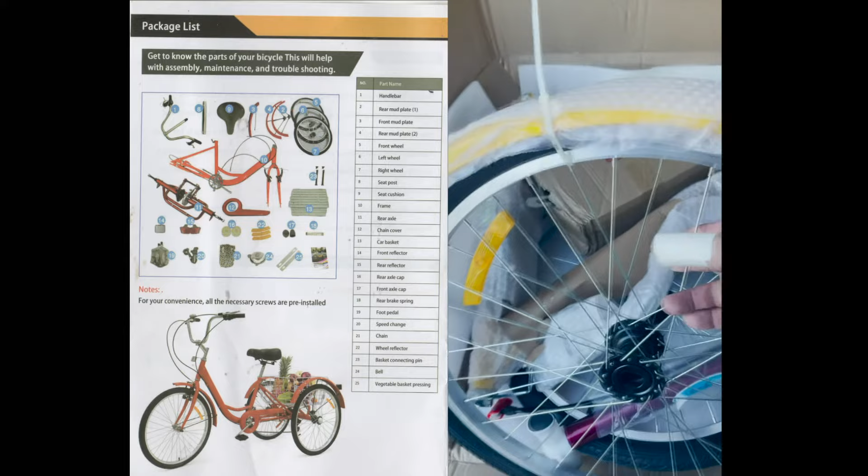First look, it comes in a nice sized box. Let's open it up and see what's inside. Start to remove that, and we'll begin to see all the components. This must be the basket. Then we see the bicycles, the tires, basic frame, all wrapped up, keeping it nice and safe. They've zip tied the fender to the tires, which keeps the fenders from getting bent up and makes a nice way to pack them as well.

Handlebars, all wrapped up. Tire pump. And the basic frame and the seat. So they've wrapped everything very neatly, to keep it from getting scratched and damaged in transit.

All looks pretty good. Looks like this bag must have the rear axle. This particular variety is a 7-speed, you can see all the sprockets. This box is probably the one that scares most people, because I'm sure it has all the little parts and the screws in it, and hopefully the actual instructions.

I guess it comes with a bike lock. Nice. So a set of Allen wrenches to help you put it together. Nice. This must be the instruction book.

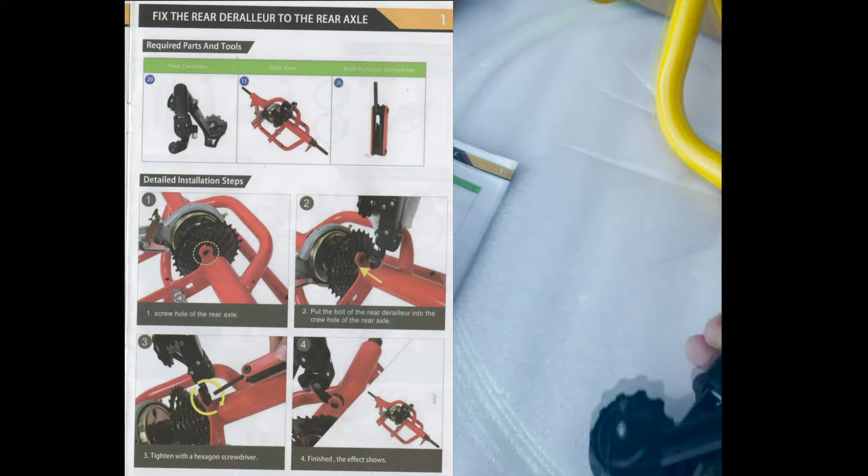We're going to need the tool they gave us, and it tells us where to put this on. So we're going to put this piece on there. Now, just to show you, when it came, the screw was already in place but it wasn't firmly seated in. So I'll point out, you notice it has those little tabs. First make sure that the screw seats firmly in the way that it's supposed to.

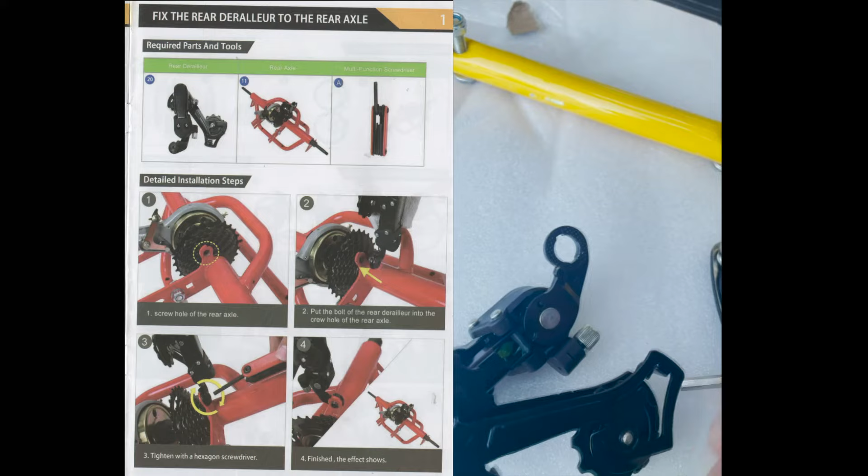If you're wondering, the part with the little dimple pattern here, that's going to face the metal. That's to keep it from moving. You'll see it smooth on this side. With this snapped in place, you see that the bolt fits down smoothly. You'll see how the tabs are hugging the inside, to keep it in place while you screw it in.

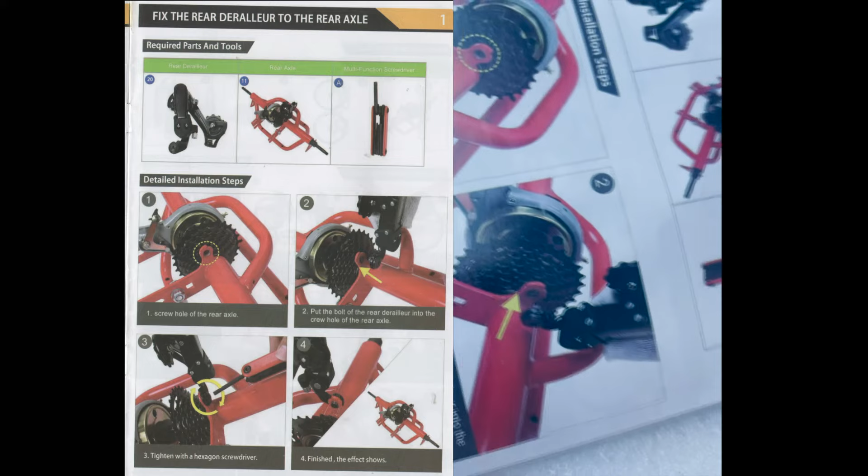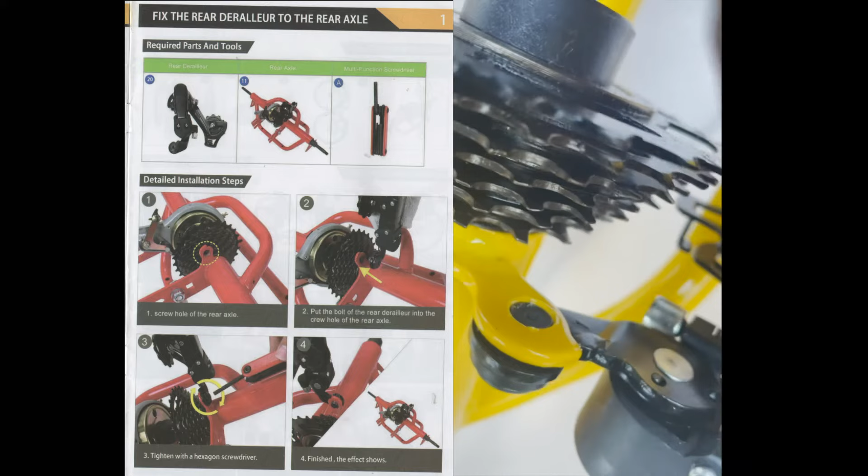And then we're going to put it on right here. Based on the picture, looks like we want it standing up, so we're going to hold it just like this when we put it in. As you get this in place, you'll notice the rear has a little hold onto it. If you come from this side, you'll see how there's a flat edge, so when this is in place, that's going to catch right on the end of that. Now we just have to tighten it down. It says we're finished when the effect looks like this. So go over to the one that I just put on, and I think that means we're finished.

Step 2 says we're going to attach the wheels, or a wheel, to the back axle. We'll need the wheels, I have those here, these rear axle plugs, the little plastic covers to keep it from snagging on anything, and an adjustable wrench, which I found.

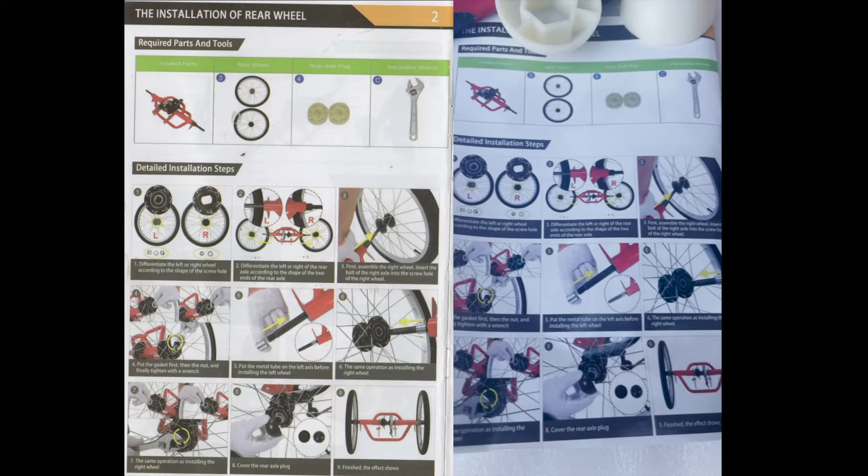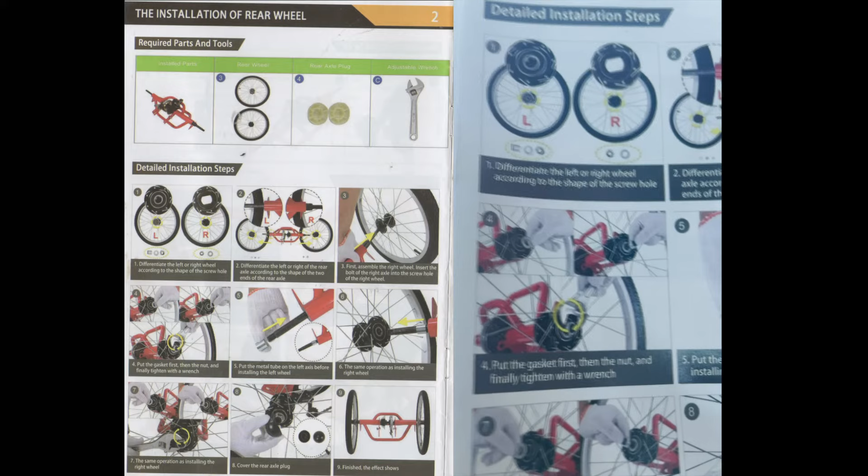So now we will follow these instructions. First, it tells us to determine the left and right wheels based upon the shape of the screw hole. Then, given that, we will put it on either side, fit it on the assembly, put in the gasket, then the nut, and finally tighten with a wrench. Put the metal tubing over the left axle before the left wheel, and then the same operation as with the right wheel.

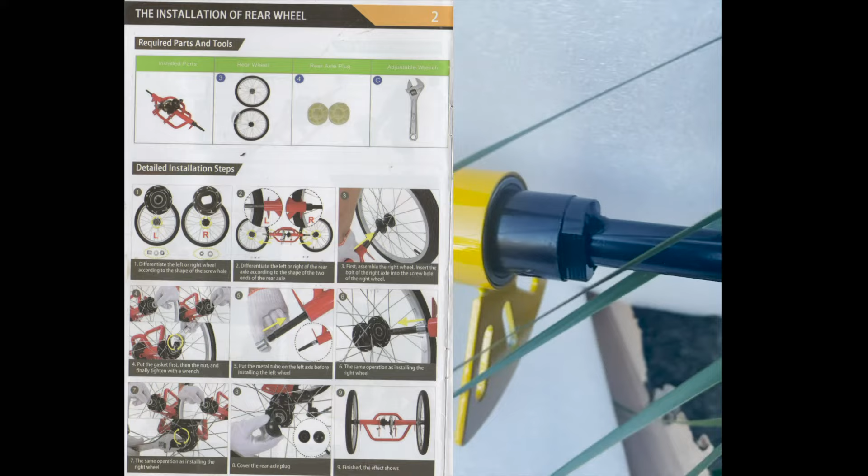And put the plug on it. So let's see if we can get that done. This one with the circular axle entrance is going to be the left wheel. This one with the square or rectangle is going to be the right wheel. And then when we look at the actual axle, you'll see that the rectangle one applies to this side, and the circular one will apply to that side.

And there's the metal sleeve it also told us to insert. They have the pieces partially assembled in the place where they're going to go, so we have to take those off, put the wheels on, and then put those back in. The left wheel has this little metal collar that fits on before the wheel, and then it's bolted on. The right wheel, which they had us do first, has a square that the wheel went into. Now we just have to tap on our sprocket or our covers.

Covers are on the bolts of the wheel. It's supposed to look like this, according to this. Good. On to step 3.

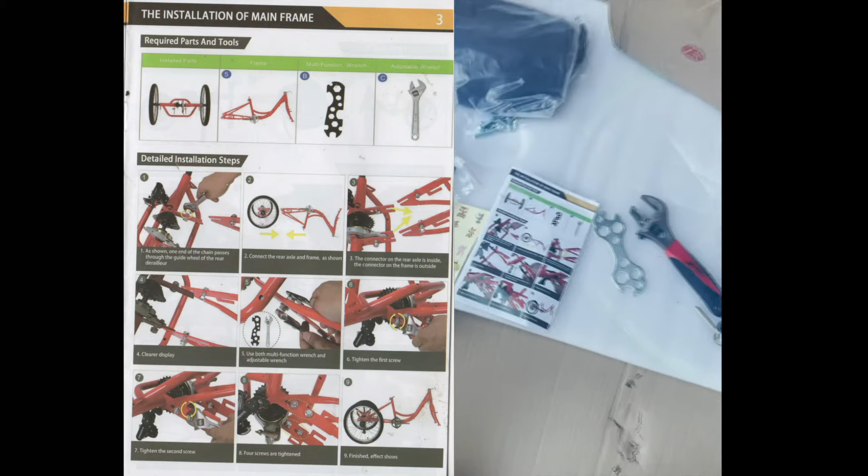Now for step 3, we're going to attach the frame to the rear axle. It says we'll need the wrench tool they gave us, as well as our adjustable wrench. And we're going to first,

One end of the chain passes through the guide. Then we're going to have it on upside down. We figure out where those attach. Then, that's a clearer display, it says.

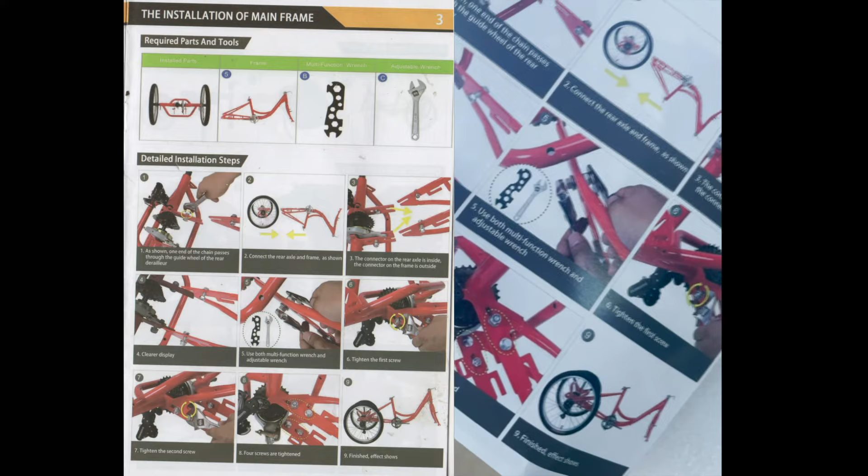Okay, we're going to use the multifunction wrench and an adjustable wrench to tighten those down. We're going to tighten the first screw, tighten the second screw. Four screws are all tightened, and then we will be finished like this.

Now, during the unpacking, I would caution that as you remove the packing, just be careful, don't go crazy with your knife. You do have a couple of cables that are going to be for the gear shift and the brake. You want to make sure you don't nick those accidentally. So use care as you take the plastic wrap off. That was to keep your frame nicely painted.

This axle on the bottom here is just temporary in order to maintain the spacing. We'll have to remove this before we put it together, as you see in their pictures here.

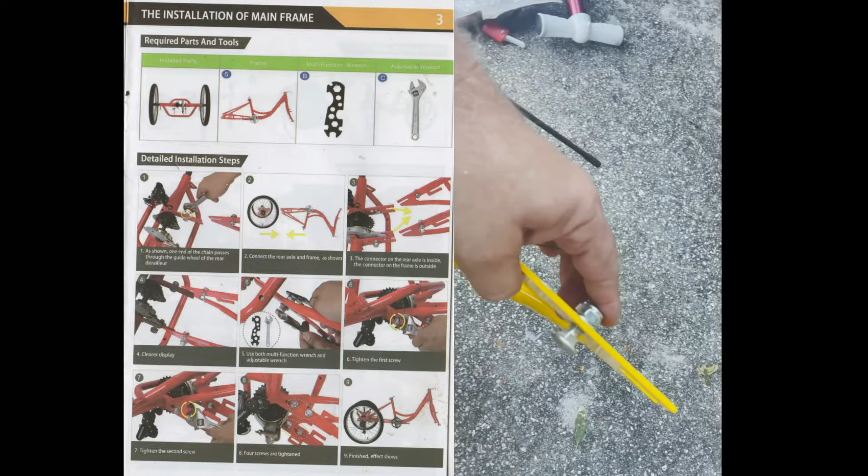Here I'll point out, you'll notice on these screws that they have kind of a square head on the inside. Now that doesn't fit through the hole here, so this is designed to fit in this slot, so that when you tighten it down, the square fits on the inside, and that holds it while you tighten the lug nuts.

Now before we start tightening this down, you'll see we slid it in where the rear part slid over the bolts. Now the picture only shows one, but I have 2 bolts on this one. And then this front bolt is the one that had the square end on it. So if you look, you see the square and how that fits into the slot.

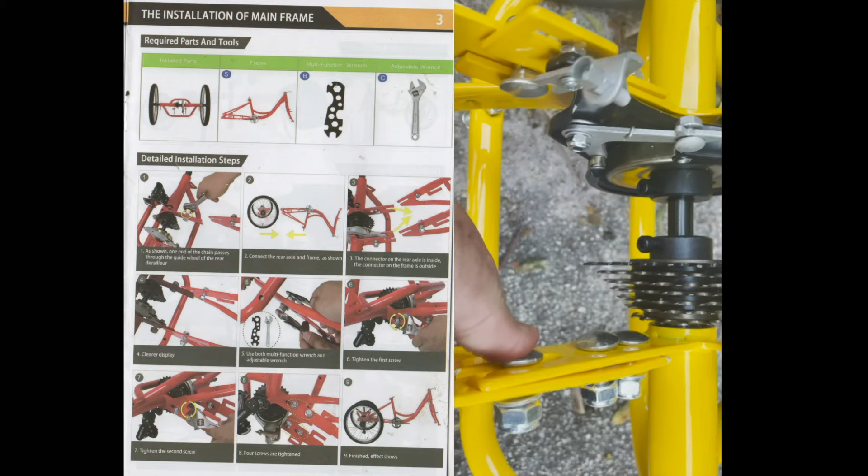So when you tighten it down, then it won't turn. Same for this side. See, the square end will go right in there. Now I'll point out, as you tighten these, you'll notice, see, there's a little bit of gap between the metal. Obviously you're going to pinch that down, so you'll know you have it tight when you bring it all together

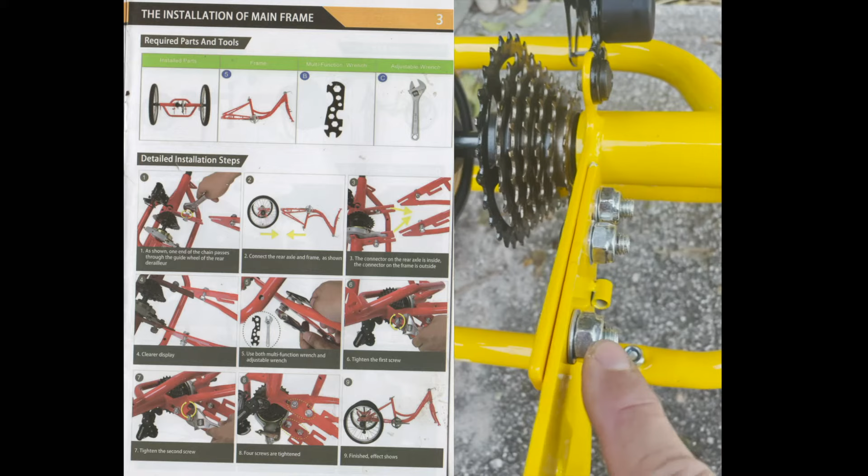Like this. And you may want to tighten one down, not as hard as you can, but snug, then move on to the next one, and move on to the next one, and then come back and finish tightening them down as snug as you can.

I guess I should point out one discrepancy between the instructions and the actual bike that I have. And that is, it shows you when you're tightening them down to use the multi-tool on one side to hold the nut and your adjustable wrench on the other side. But point in fact is the ones that I have, these carriage bolts, and the carriage bolts have a square end. So you don't have to have anything hold this side. So all you're using is your adjustable wrench to tighten them down.

At the end of step 3, it says to set the bicycle upright, which I have done, and remove the rest of the safety packing to help protect the finish. We're ready to move on to step 4.

Step 4 is about installing the chain. It says we'll need the bike frame, which we just set up, the chain, and this chain tool. And we see we have this here.

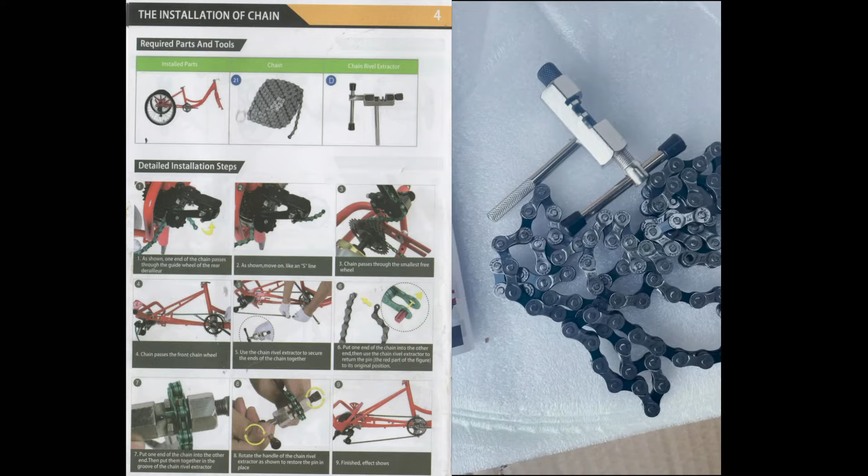I will point out, you should work, just don't be aggressive at straightening out your chain. If you get a double kink in it somewhere, just be gentle, go back and forth until you get it worked out. You don't want to tie it in a knot.

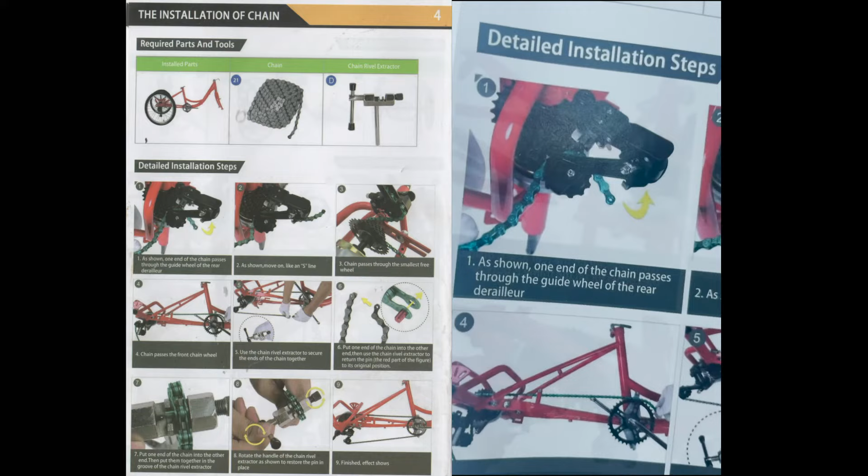But this begins to show you how you go through one end of the guide wheel, or you're going to go around the sprocket. It says to go through the smallest freewheel, then you pull it forward, you go over your pedal sprocket, you're going to bring the two ends together,

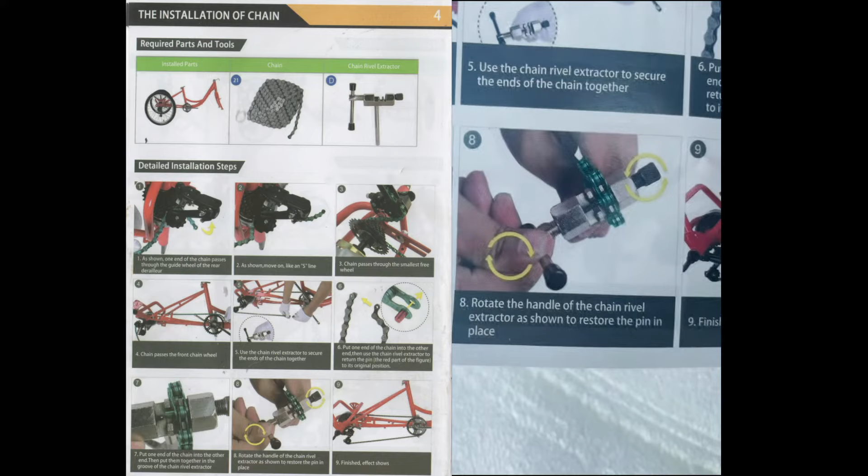You're going to put one end of the chain into the other. In the tool, you see where it's mashing the piece in, and then as you tighten that down, it puts the little peg between the chain in order to have it finished.

The chain comes with this last peg extended, so you're going to put it through this hole into the chain, and then the tool is used to clamp this little bar in all the way so that you have a solid chain when you're done.

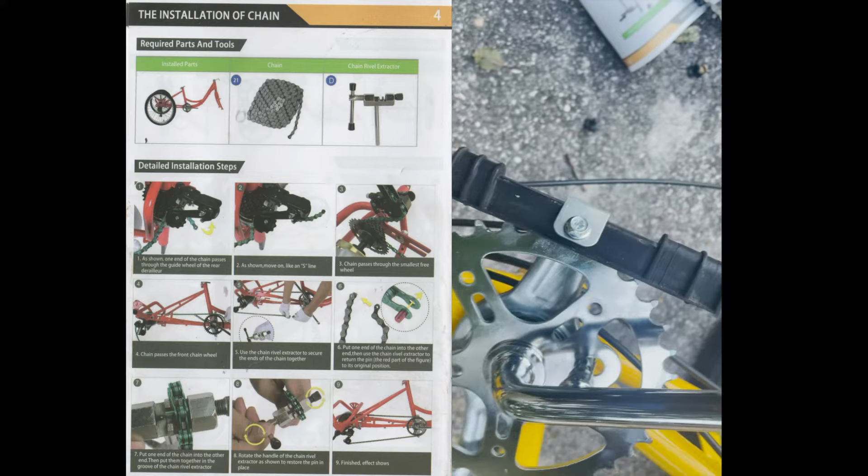Now you'll see there's this little plastic bit covering the sprocket here. That was to keep the sprocket from getting damaged in transit. So we'll want to remove the screw so that we can take the safety bit out. On the little handy dandy tool they gave you, there's a Phillips head that'll fit right into that, so I removed it. I put the screw back in, although not all the way, because that's going to be used when we put the cover guard over this later.

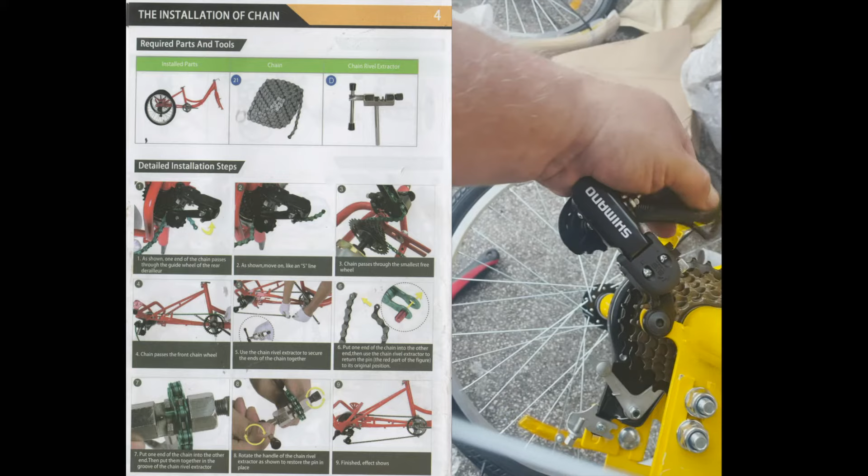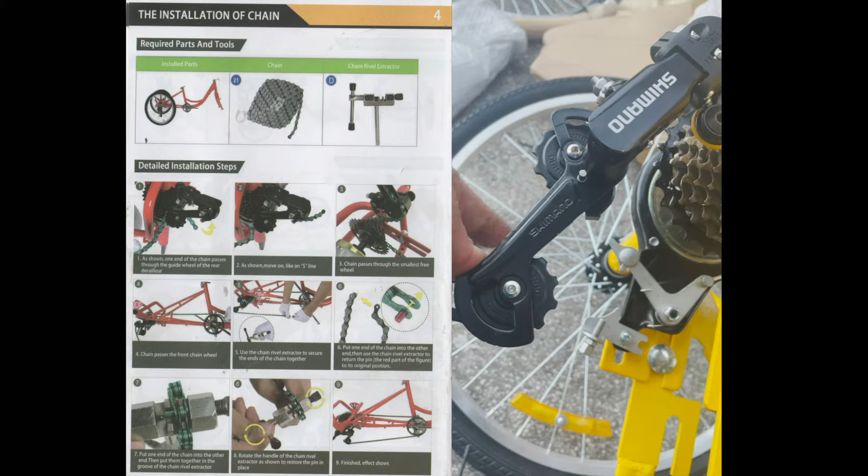Before we get too much further with the chain, when you put this on, it initially will be in this position, but realize this is spring loaded because it has to have some tension on it. So you need to move this forward, and this is the way you're going to load the chain on it when it's in this position, so that maintains tension on the spring. Because as it adjusts up and down the gears, the sprockets are different sizes, so the chain has a little bit of play in it. This is made to take up that play, so when you're in high gear or low gear, this will move back and forth.

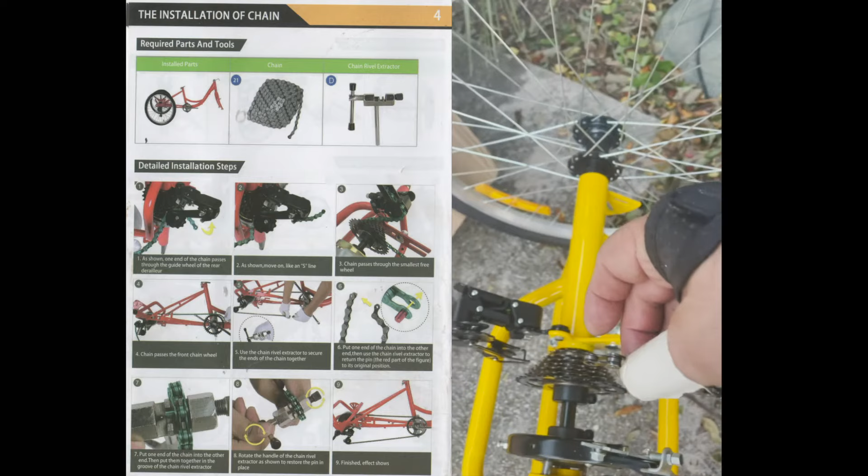As you start, I think it's easier to start with your chain over the sprocket with a length, because that'll help you control the tension. If you just try to wrestle one end of it without it being stretched out, that's when you start getting into knot positions and those kind of things. So start with it like this, and then follow the instructions, go around the cog, S-shape through the tension, and then we'll join them together.

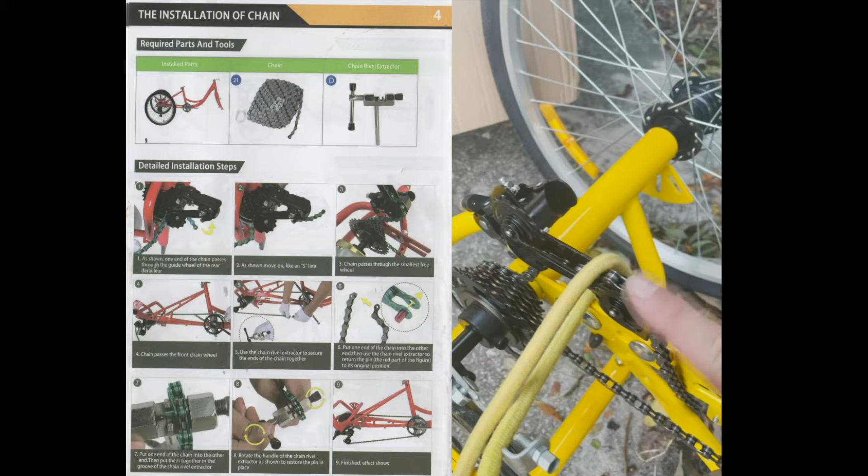Okay, a couple of quick things. Since you're dealing with tension on this, it can be hard to figure out how you're going to attach the chain together, because the links don't come easily, and when you pull on it, it's going to be difficult. So I use a little bungee, just put a little bungee to hold that while you're running through it.

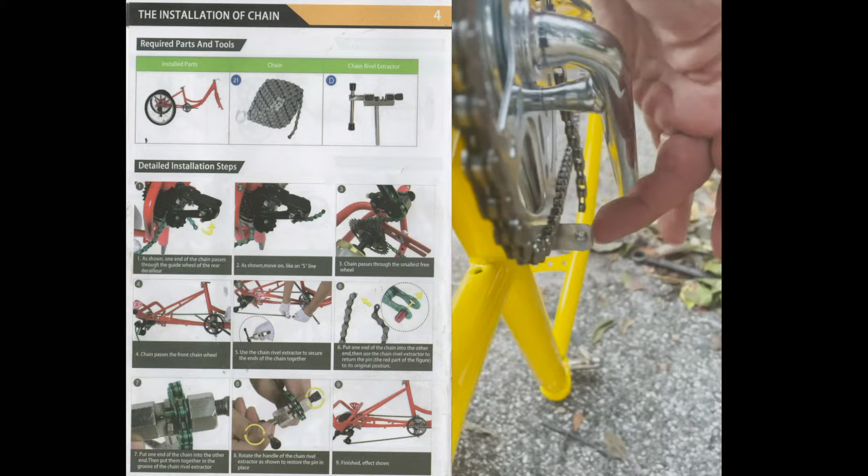You'll also notice these guards. The chain runs under the guard on this side. There's a back guard over here, so the chain runs on the sprocket side of that, always on the sprocket side, past the guard, around your rear sprocket, through the frame. Make sure you don't get your chain tied up in your bungee. Then it comes over here to the main sprocket. Now what I'll point out over here is that, remember, you have these guards that are going to go on the outside, so make sure you have your chain inside the guard, and then your two ends are nice and loose now, so we'll be able to put the tool on it and tighten that down.

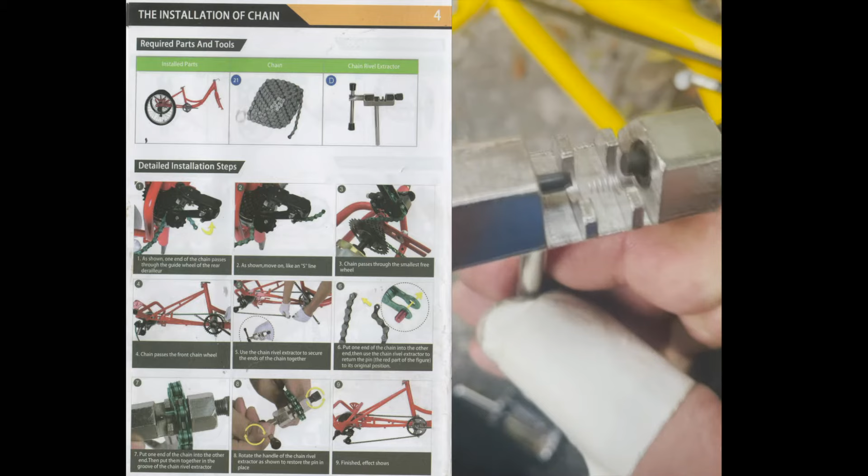You'll see there's a place for the chain to run, then there's that end that'll fit against the edge, outside the edge of the chain. This is the end that's going to push. You tighten this down like a little vise. So once we have our chain in place, we'll just tighten this down until it pushes the peg in.

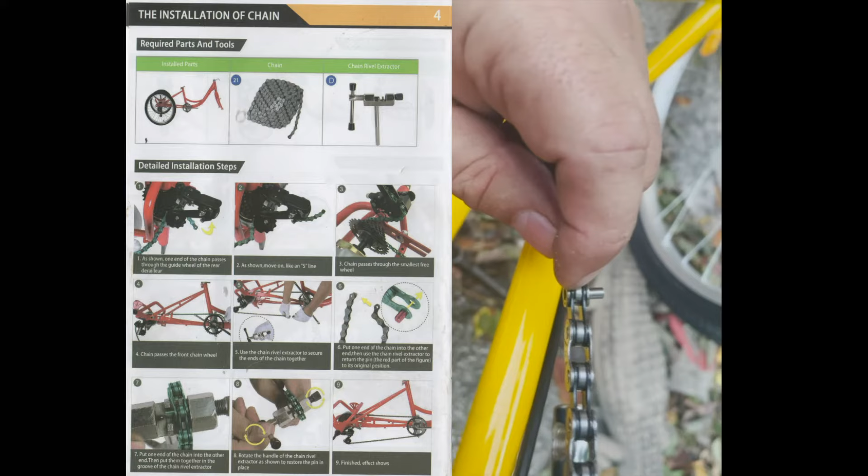Now I want to point this out. When you start to put this in, you may find that because this peg is already sticking out a little bit, it won't quite fit in. So what I did is I actually started with the inside part, which is a little thinner. Take the hole past the peg, push it in, and then pull back gently until the friction gets it in the right place.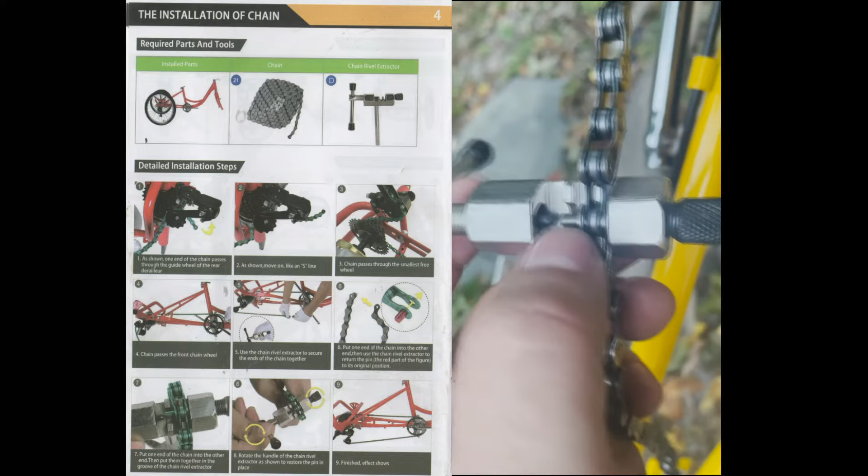Now we're ready to put the tool on it in order to tighten that peg down. You'll see I used the little guide barbs here, so I have that on either side. I tightened this down just a little bit in order to hold the pressure on the outside, and now I'm ready to tighten the other side to force that in. You see I've tightened it now.

Now when it gets close, it's going to get tighter because it's trying to push the peg through the other side of the chain. So you don't want to push it all the way through, but you have to drive it down until it looks like it's set the same way the others are. So that's about right. And once you remove your bungee, you'll see the spring action picks back up again. And if I go in reverse, you'll see everything is clicking along the way it's supposed to.

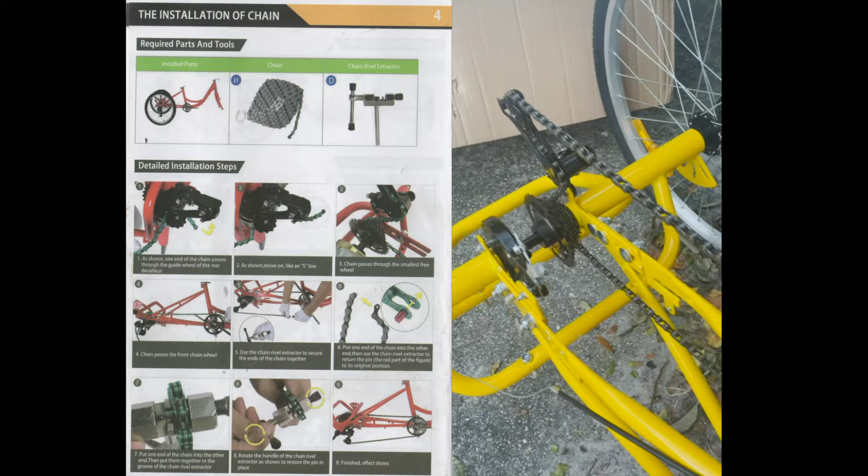So I think that's the end of step 4. Step 4, as you might guess, and step 5 is going to use our multi-tool again for the Phillips end in order to put the chain cover on.

Just as we thought, the screw that we removed before, we'll take that out. There's one at the top. Put the chain guard in place, put the bolts back on, and we'll be done.

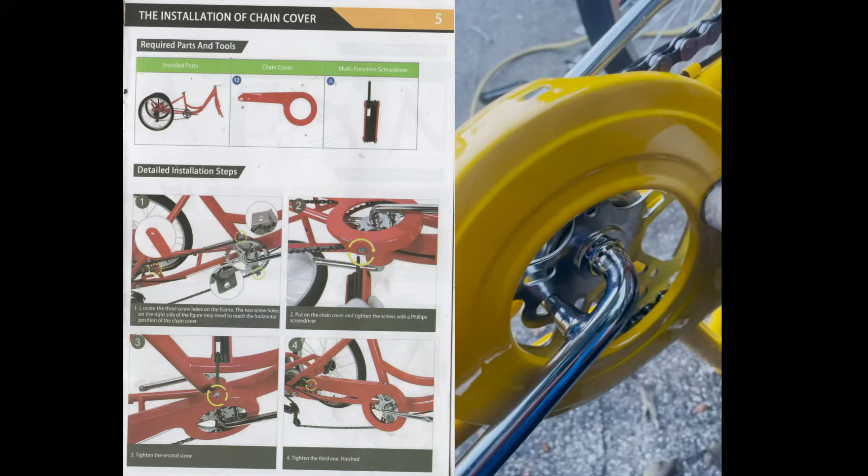Now when putting this on, I'd first suggest don't pinch any wires that might be in the way, but put the screw on back here loosely. You'll see it has some play in it, and that will let you adjust the front as needed in order to get your screw in here and here.

So that was the end of step 5. Step 6.

Now we're going to install the front fender. So we're going to need the fender, these little pieces that hold it in place, and then where we put it on.

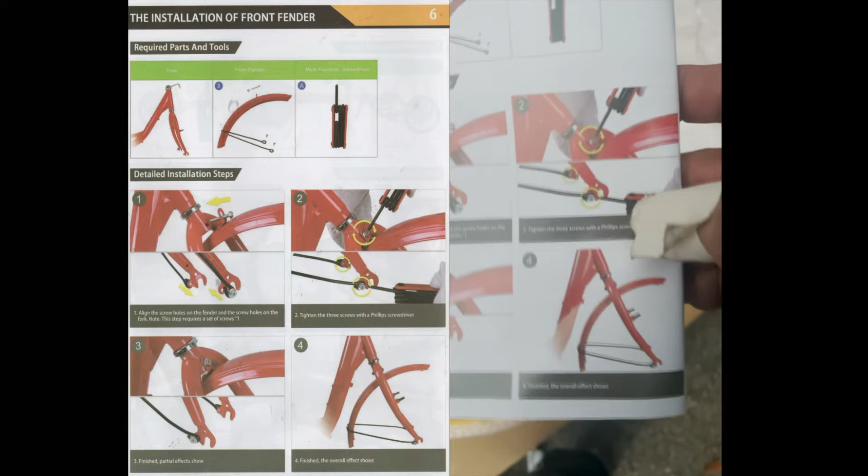You see how it attaches in the front up at the fork. Then it has these rear ones that attach down at the bottom of the fork, and that holds it into place. A couple things to pay attention to.

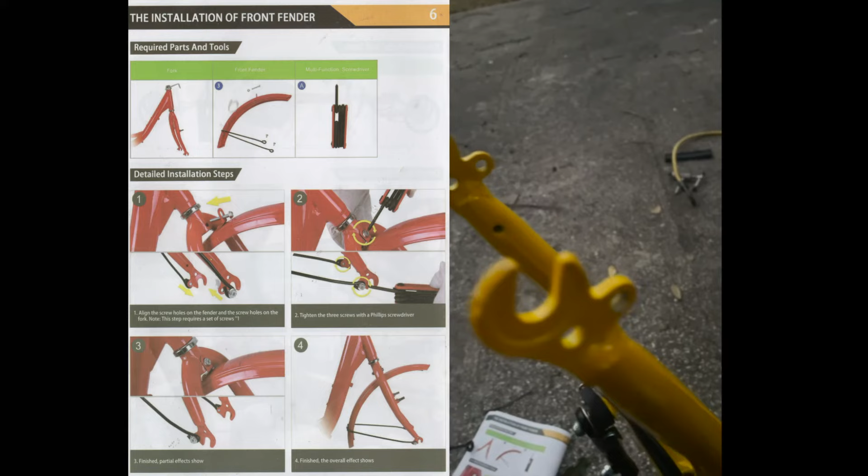When you put the fender on, you'll note in the diagram that the first part goes in the front of the bike. If you have this upside down, you may not be paying attention, but it will be important because when the fender is on the right way, the bars will meet up with it out here. If it's the wrong way, you'll see it's trying to pull against the outside of the bar. So make sure your handlebars are turned the right direction, then do your installation.

Okay, on to step 7. So we need the end caps for the axle. This is the front wheel assembly, our adjustable wrench.

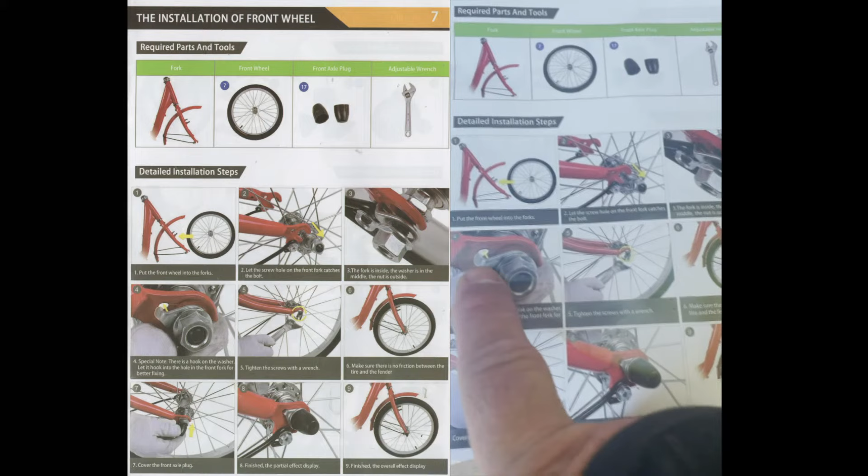Look at the instructions. This will be an important point to note that the washers have a tab that fits in a little hole. That's to make sure they stay in position.

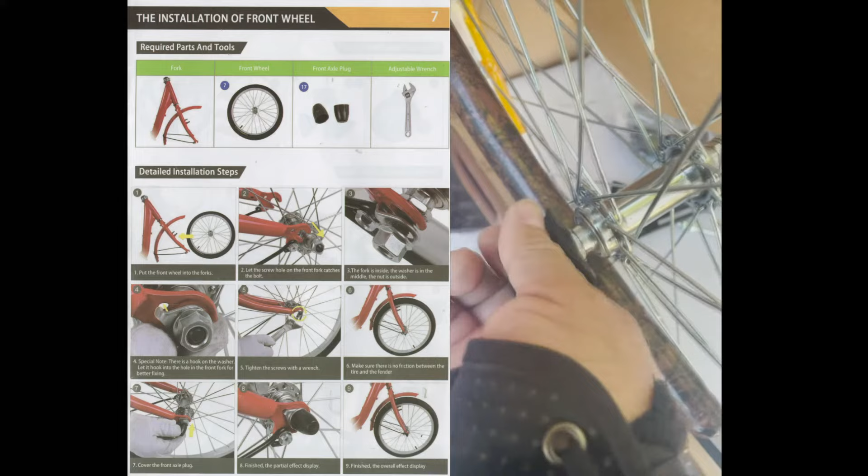Pretty straightforward. I will point out they're shipped with these little booties on them, so you need to take those off first. And it also already has a cap on that one. These little booties are just to help protect the ends during shipping.

The other thing, this one came partially assembled already with the cables in place. So obviously before we put the wheel on, we need to take this loose to get it out of the way.

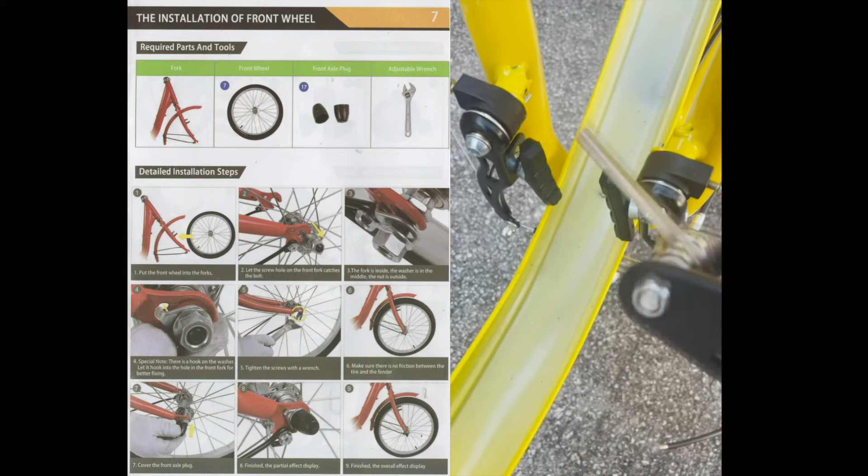Okay, now we're ready. One other thing I noticed was this one came partially assembled, so it already has the brake pads and things in place, although they're in a vertical position, and that's not going to be right, I don't think. But in order to make it easier to get the tire on, I'm going to loosen these so I can let those flip around until we're ready to adjust the brakes.

So they have a little adjustment screw here on the back. We just have to loosen that up. You'll see it turns around, and once we have those loosened up, we'll be able to get the tire on to tighten it on.

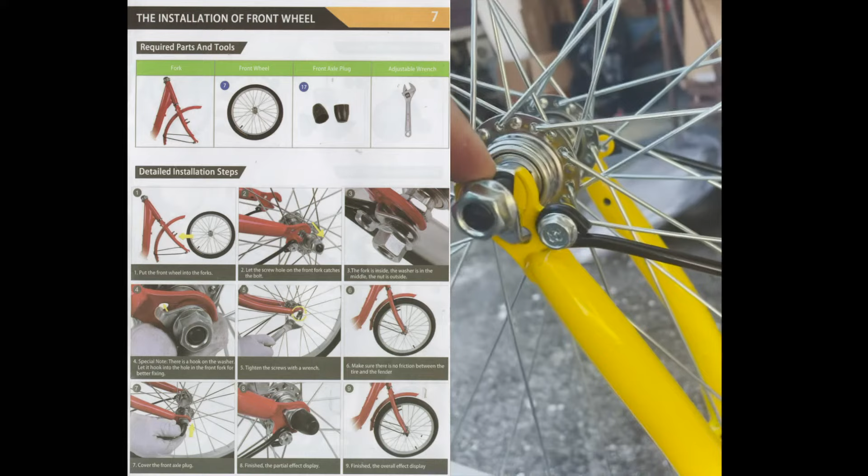Now, as noted, you need to make sure you've taken these off so that when you put the wheel on, you put the washer so that the hook goes in the hole, and then you begin to tighten them down.

Another precautionary thing I'll point out is that when you begin to tighten these, you'll notice that when you reach a certain point, turning this side causes the other side to turn as you tighten it. So it's important to have two wrenches, or to tighten both sides a little bit at a time, so that you begin to get them where they won't spin against the other side.

See, there you go. One of the things it cautions you about here in this step is to make sure there's no friction between the tire and the fender.

Now, the fender piece is a piece of lightweight metal. Let's not overstate it, I mean it can be bent, and these could get bent in transportation. So just make sure you look at it, make sure there's no contact between the tire and any of the fender parts. If there is, then just a little light pressure one direction or the other will probably help bend that back into place.

Make sure those are seated well. The other thing, we haven't got to these steps yet, but there's the adjustment of the brakes.

So you'll notice that is a little bit close right now. I had to loosen the wire a little bit to let that open up, but it just spins freely right now. When we get to the brake adjustment, we'll make sure we have those right. But the key at this step is just to make sure the tire spins without encountering any friction along the way.

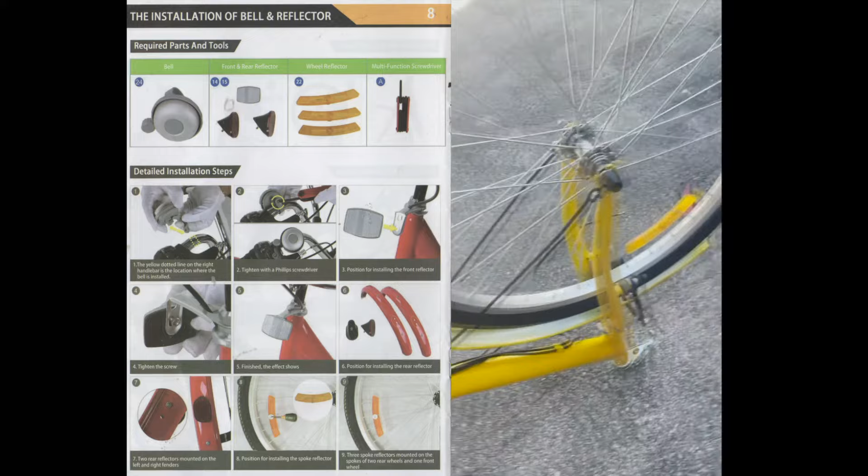Step 8 has us put on the bell and reflectors. We're going to need the parts that are mentioned, as well as our tool. Here's the bell. It also points out the tire reflectors, but on this model, the reflectors were already in place on the tire, so we may just have to test that they're adjusted properly.

Now I will point out on this step for putting on the bells and reflectors, it has you working on parts you haven't put on the bicycle yet. The bell's going to go on the handlebar, which I have unwrapped here, and the reflectors are going to go on the rear fenders, which I have unwrapped here. So carefully, if you haven't already, take your wrapping off of those. Try not to scratch them.

The only part, as I said, these were already on the tires, so I will just check those. And then this one goes on the neck, where the handlebar goes, which is currently right here on the front of the bike. So these parts we're going to put together, and then subsequent chapters will have us put these parts on the bicycle.

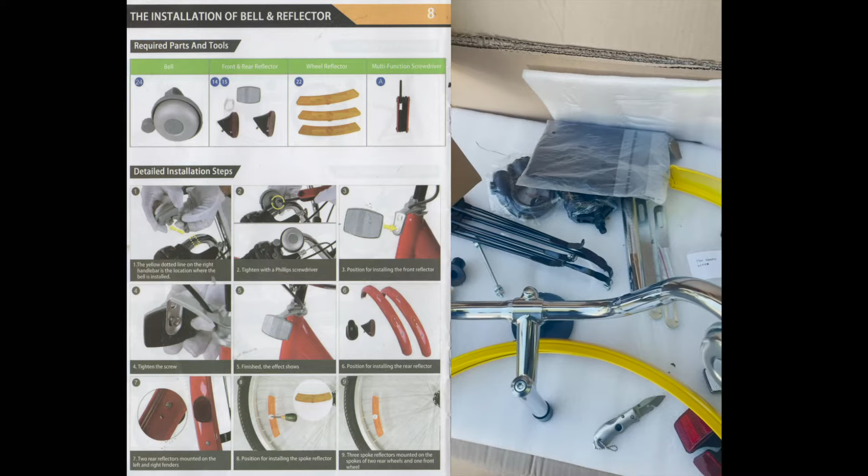When it comes to the bell, you take the screw out, you put the loop around the handlebar. The instructions specifically told you to put it on the right side, but it'll just as easily go on the left. I think the key is to make sure the striker is in a position where you can reach it easily. Obviously on the other side, the striker would move in the other direction. But if you're left-handed and feel more comfortable with your left thumb, then try it on the other side. You can easily take this off and move it later.

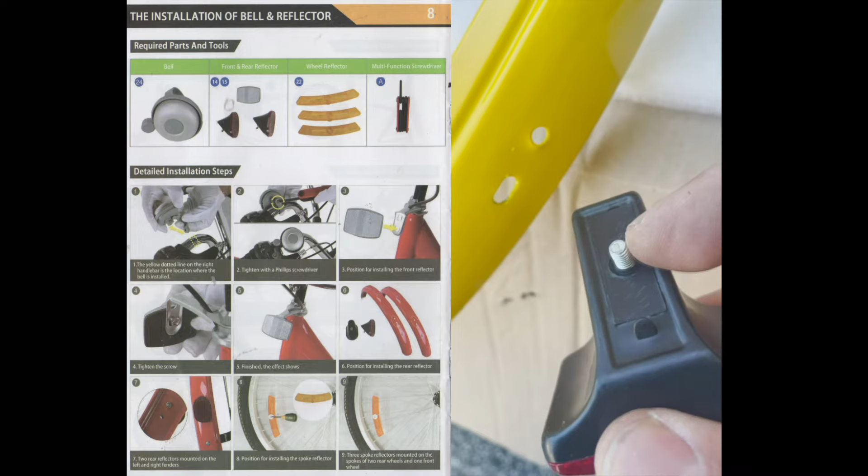I'll point out something here just to make sure it's clear. You'll notice when we're putting the rear fender on with the reflector, it points at the two holes on the back. On this model, you'll see the two holes: a circular one and a rectangular one. If you look at this, you'll see the nut area, and then there's a little clip here. See that? So when you put this in, the clip is going to fit in the bottom hole, like so, and then you tighten it down.

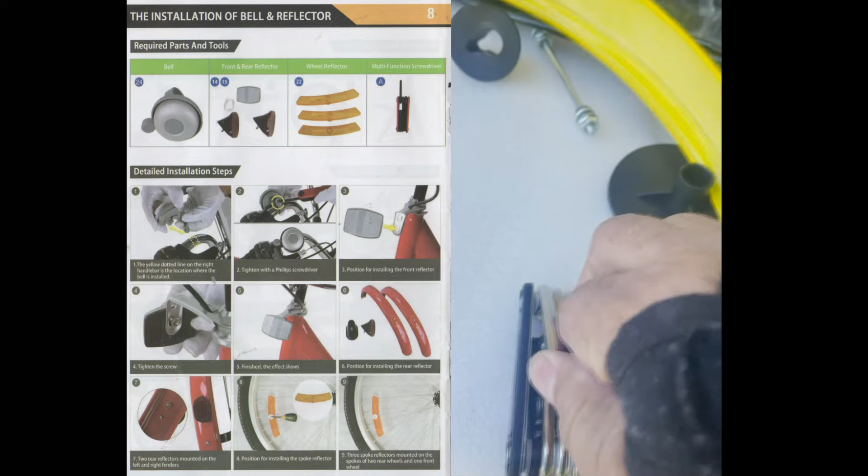Now the instructions don't spend a lot of time talking about the tool they gave you, so I'll just point it out. It has a number of hex tools. This works like a Swiss Army knife. If I could do it one-handed, you just bend up the appropriate one for the size of the item you're dealing with; the rest of them you leave in place. But I should also point out that on the other side, this particular tool comes with one. This has some various hex nut tighteners on it, that handle. There's also a flathead screwdriver, a Phillips head screwdriver, and this is a driver head.

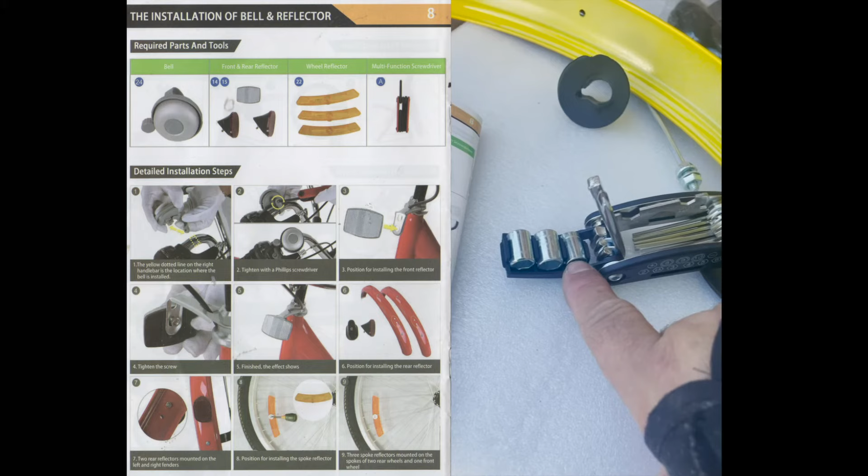So if you see these sockets underneath, you can take those off, find the one that fits the appropriate nut, and then put it on the end of this driver in order to drive that in. So it's pretty neat—they gave you a nice tool that has all the little attachment gadgets you're going to need, everything except an adjustable wrench for the larger size.

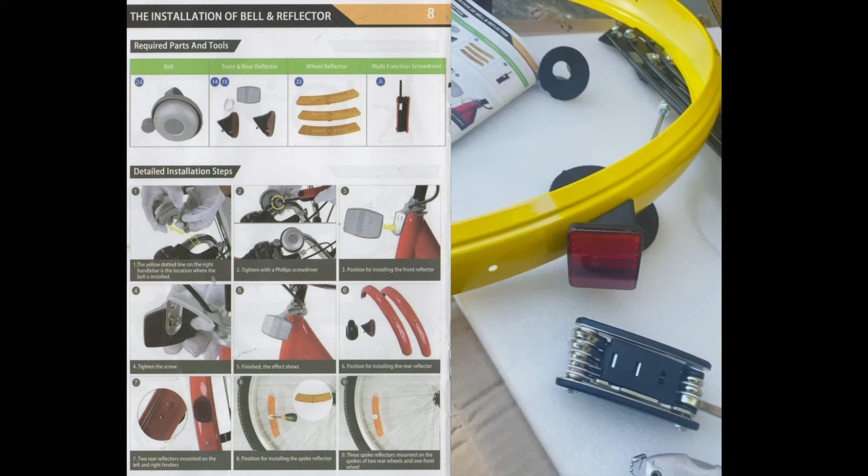One of the complaints I saw online, people talk about these fenders being very lightweight and flimsy. But remember, the fender isn't a bumper like a car where you're going to hit something with—it's to deflect material that might fly off the wheels. So you don't want to add a lot of weight to your bicycle, which is why these are very lightweight. If yours comes with a little ding in it, you can very easily bend it back out with your hand. It'll be fine. So just be careful when you're putting them on and don't twist them unnecessarily.

The next step is going to have us finish with the rear fenders. You'll notice they're showing you the detailed installation here. The first step will be to attach these additional supports to the actual fender, and the way these came are like this.

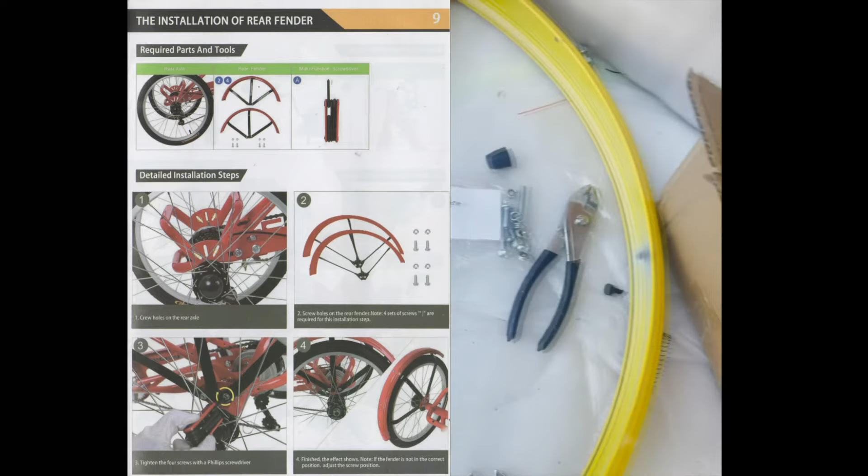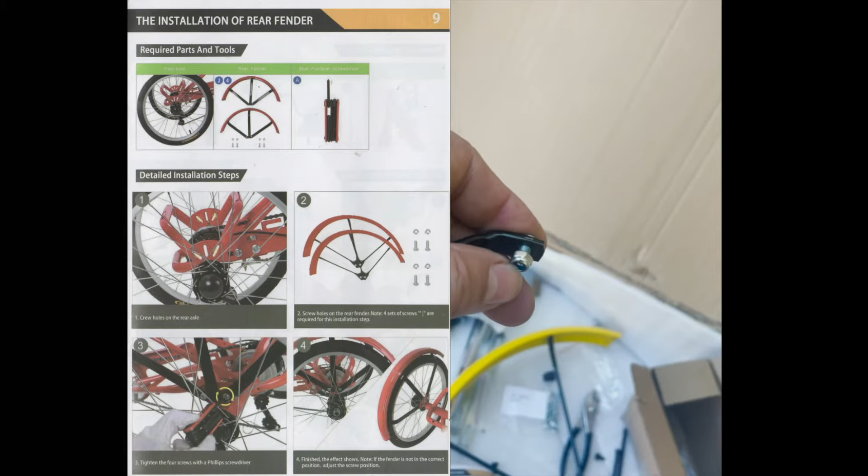You'll notice yours may have the nuts already in the holes and you'll have to take those loose in order to put them on, or they may have come in a separate packet or envelope. You're just looking for those, then follow the instructions on how to place these on. One thing I'll point out on fender assembly: these nuts have hexes on the bottom and a little rounded top, so it's important to put it on the right way. This is because it has a little seal inside to help it stay tight so it doesn't come loose while you're riding. So it doesn't have a washer per se, but there's a little nylon insert inside. Just make sure you put the nut on the right way when you tighten it down, and I like to start with the center.

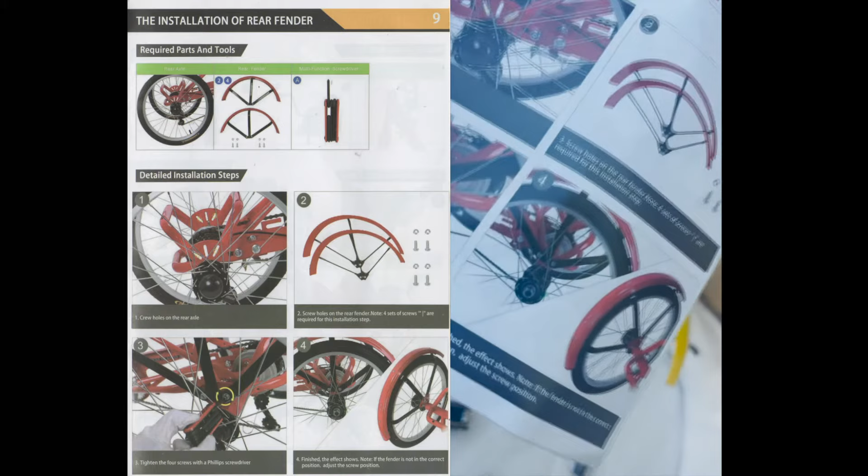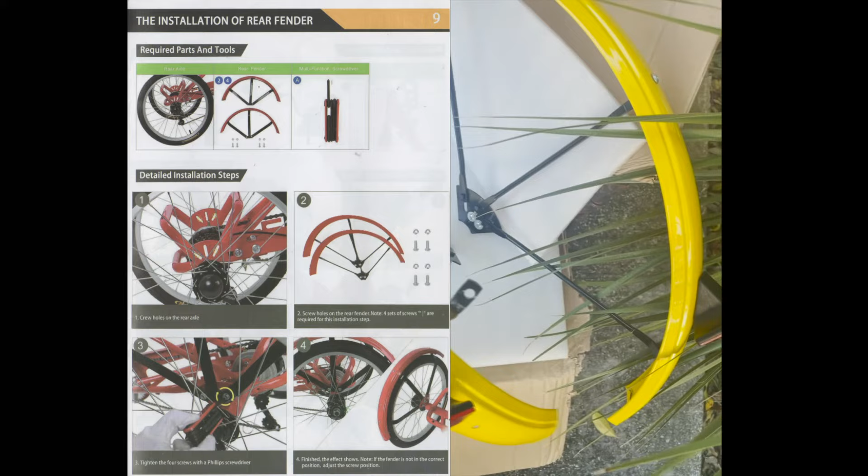Here's something I should point out: the diagram doesn't show the previous step where you put the reflectors on. But if you look carefully at the bottom diagram, you'll see the two holes where the reflector goes are facing toward the back. It's important to note that since one of these fits on each side of the vehicle, you want to make sure you put them on opposite sides from each other, otherwise one of your reflectors will face the wrong way. You'll notice I put this one on so the arm is on the left side when the reflector is facing me, and this one with the arm facing the right side with the reflector facing me. Very important thing to note.

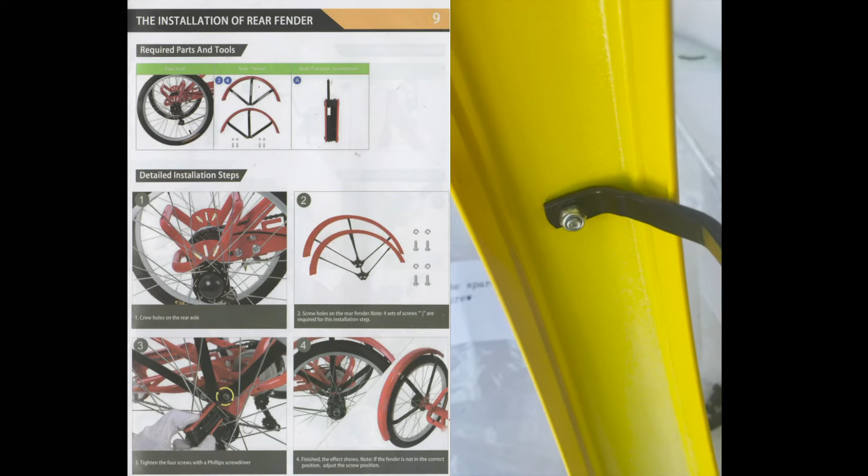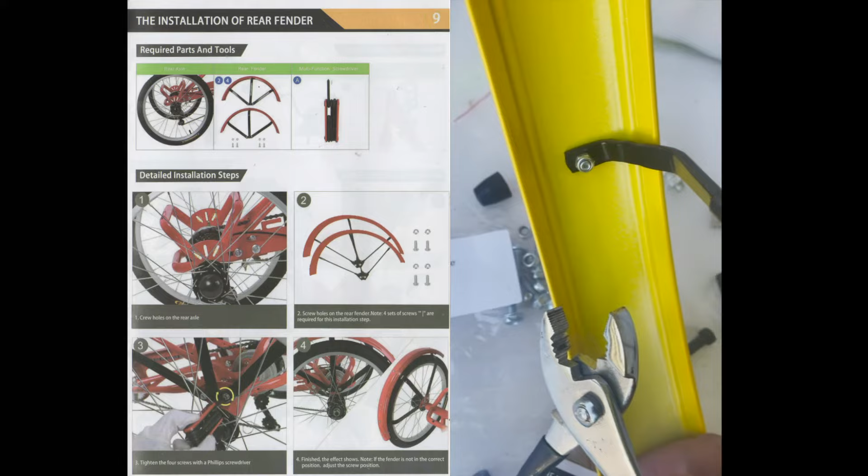Now, not mentioned in the instructions - as I pointed out, these particular bolts have a little nylon washer on the inside to help them stay tight. So this might be a case where you need an additional pair of pliers to hold the bolt on the inside while you screw it in, otherwise it's pretty hard to hold with your fingers. Get pliers to pinch that nut while you screw it in from the other side. This is also a piece where you probably need a longer Phillips head screwdriver than the tool they gave you, because they have you reaching through the spokes to reach the Phillips head.

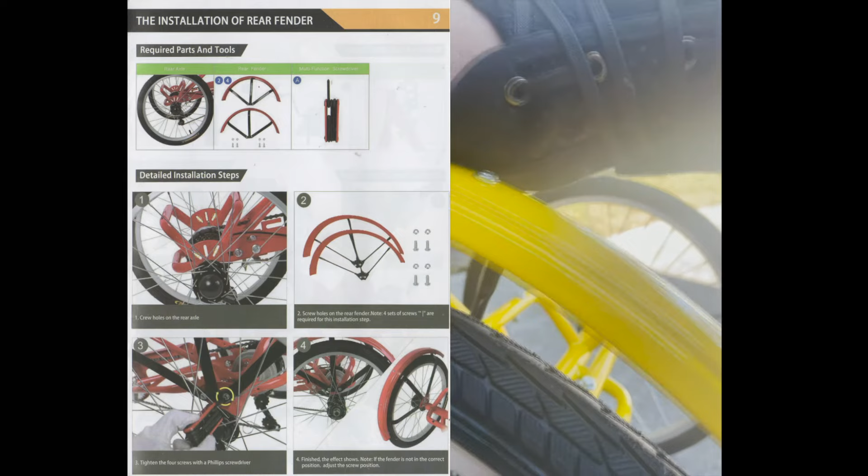So the fender piece goes on this side, and you'll notice the nut and washer go on this side. Hunt up a longer screwdriver when you get to this step. This is another case where there might be some bending in transport, so if the fender doesn't exactly line up the way you need, you can give it some gentle pressure to get it where it needs to be.

Step 10 is going to be the installation of the handlebars. We'll need our appropriate hex tool that will fit in the end of the handlebar to tighten the adjustment, and that's about it.

Now I'll point out a couple of things. It's shipped with a little safety plastic right here, so this will have to come off. The other thing to note is the handlebars themselves have adjustments forward and back, so depending on how you're shipped, you may need to loosen this nut first, enough so you can twist the handlebars around so they'll be more convenient to put in, then lightly tighten that back until you get to the part where you might adjust it for your own comfort. So first we'll take this off, then follow the instructions about inserting and tightening it down. It just occurred to me the little plastic insert may have actually had the end cap tightened first, so first loosen this, and then the plastic should be easier to come off.

This just shows you what is inside there - there's a nut, a bolt that runs all the way through the shaft here to this tensioner at the bottom. With it loose, it'll fit down through your handlebars, and as you begin to tighten it, this will move up and slide along that edge until it grips the inside of the post on the bicycle and keeps your handlebars in place.

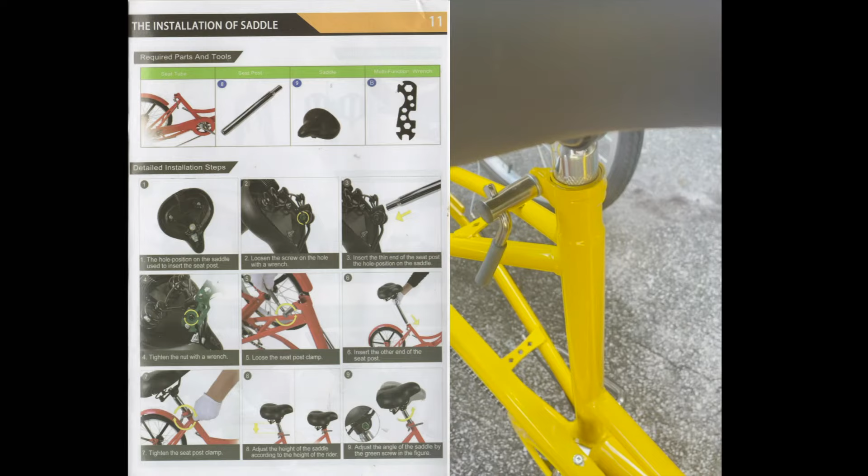And then if we look at the seat bar, you'll notice the little grooves cut in it. So you want to put it in at least as far as those grooves to make contact. And then based on your height, you'll adjust the seat up or down to be comfortable. But this can be done at your leisure, and even between different riders, by using the adjustment rod at the bottom.

Finally, I'll point out, as it says here in the last step, you can adjust the angle of the saddle, the seat, by again loosening it where it attaches to the bar, and then tilting the seat forward or back to whatever your comfort level is, and then retightening it.

Next step is the pedals, and as it points out, the pedals themselves are marked for left and right. If we look at them, we can see our little emblems in here - one has an L, one has an R, so that tells you which side they go on.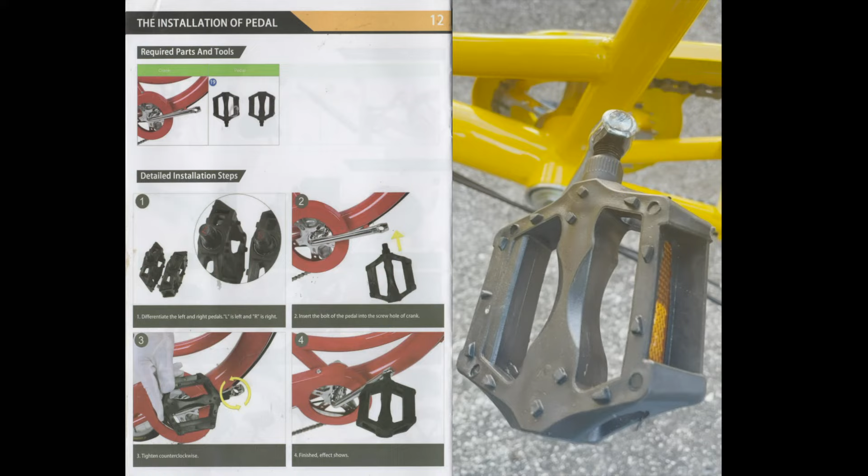Pretty straightforward. One thing I'll point out is that when it comes to pedals, the left one actually screws in the opposite direction to the other one, and this has to do with trying to make sure that it doesn't come loose while you're riding. So this one turns counterclockwise, where the right side was clockwise.

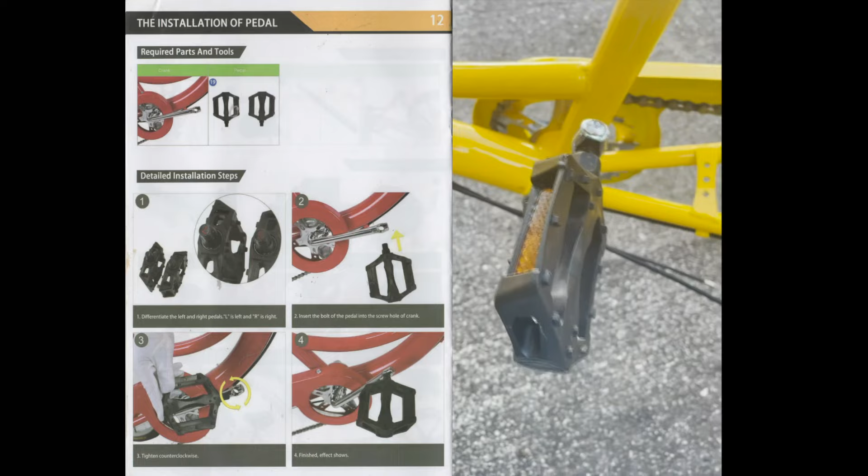Now we come to the step where we're going to install the front brakes. Now, between the brakes and the shifter cable, this is probably, I'll call it, the trickiest part. But if you just pay attention to the instructions, it's pretty straightforward.

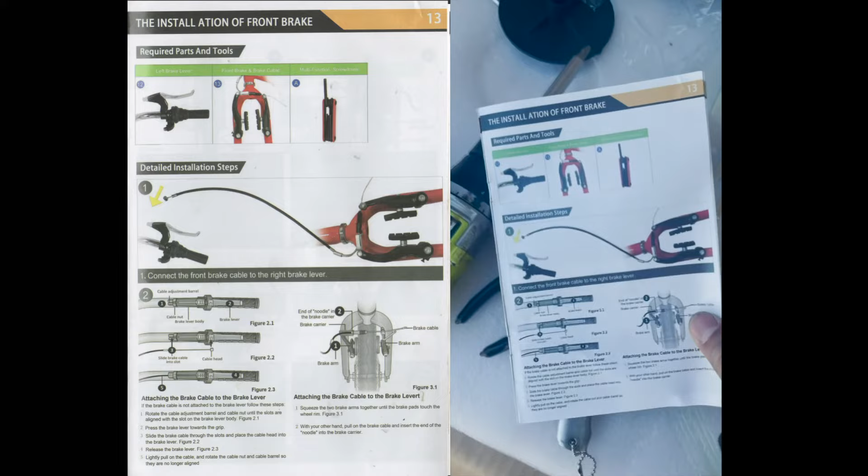Now, as I said, mine arrived with at least part of the brakes pre-assembled, so I had to loosen it a little bit in order to get the tire on. You'll notice they show you that it is shipped with them in the upright position, but when we get to the next page, it talks about the correct alignment. It's supposed to be hitting on the rim of the tire, not the tire itself, not at an angle, and make sure that it fully contacts the rim. So there are various adjustment screws for that.

But the first part is just to attach the cable to the right hand brake. That is done by stretching the cable up and seeing that little block. That block then fits inside the arm, so that when you press the lever, it pulls on that block, which tightens the clamp down to brake level.

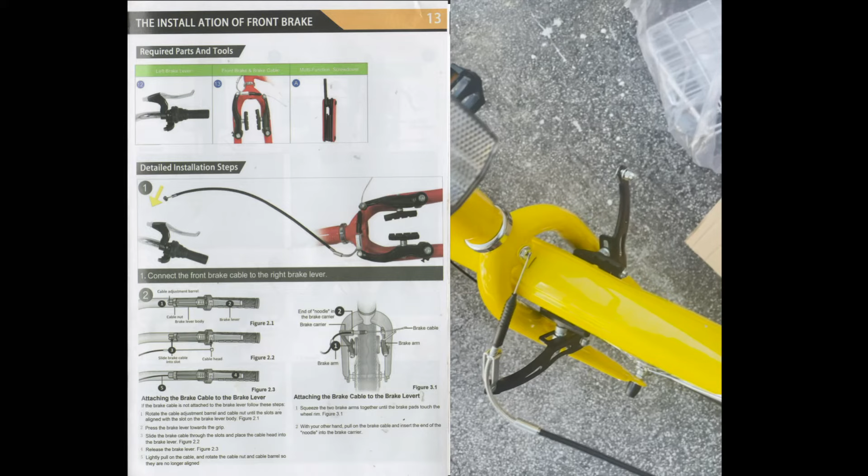To get started, I first had to loosen the brake on the other side so that the cable would come free. Just don't pull it until the cable comes all the way out - you just want to pull enough so you have plenty of stem on this side. Then when you come to the brake, if we open it up, you'll see this is the part where the block will go in. So we'll put the block in there, like so. Then we just have to press it back so that we can pull the block back on the inside and get it all to line up.

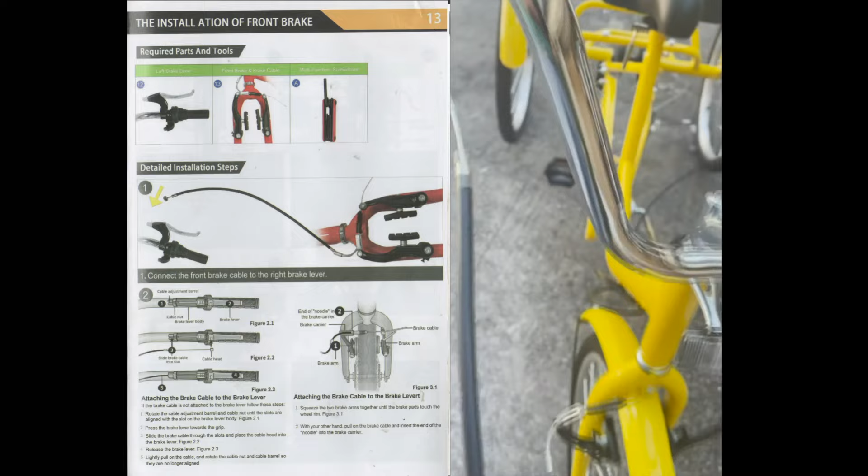All right, and that's how you attach it there. Then we'll attach it back down here again in order to do the adjustment for the tightness. So I have the brake on, I have it so the wheel will turn freely when you mash the handle. Then it clamps down on it.

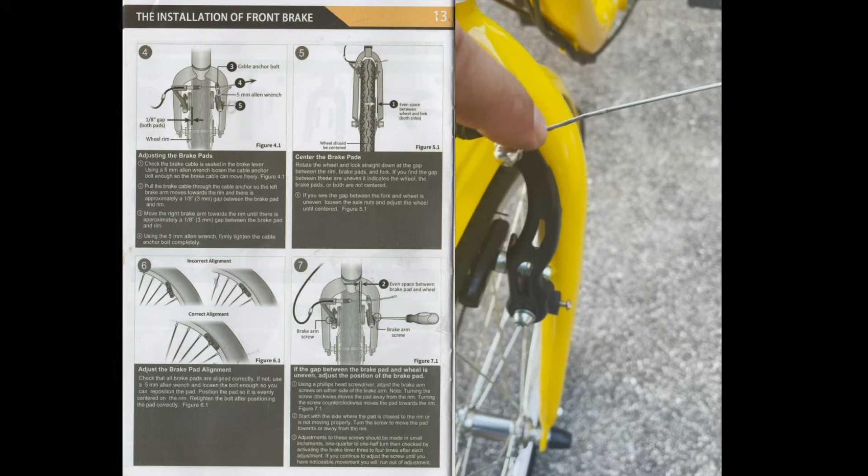So you have to loosen this, pinch them together until you reach the right level of adjustment, keep holding it, and then use the hex key to drive this onto the socket nut till it's nice and tight. You want that really tight because you don't want this cable to pull through when you want to stop. So you want the wheel to turn freely when the brake isn't pressed, but clamp securely when it is.

Next step is installing the shifter cable. This one, you see the cable is already wound up right here. We're going to straighten that out, then find the cable that runs along and back towards the shifter area, and feed that cable through there until it reaches the back.

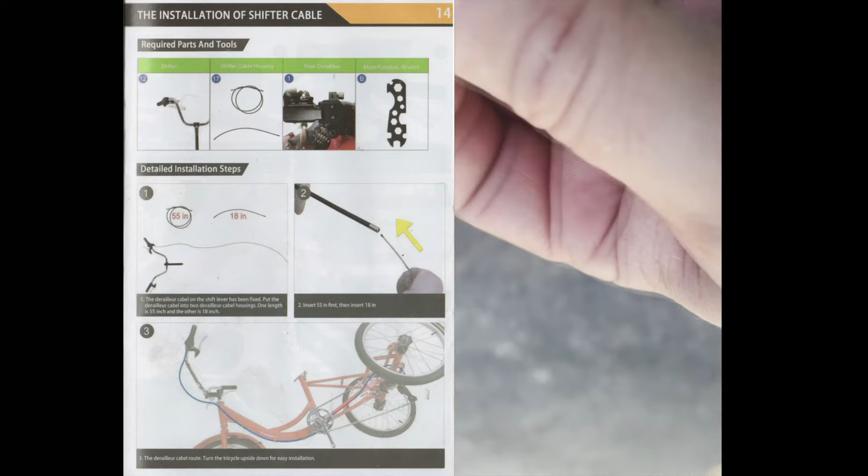As you begin to do your shifter cable and unloosen it, remember to be slow and methodical—you don't want any kinks in it. Just so there's no confusion, when you've straightened out your cables, you'll notice you have two. One has the little nut on the end—that's your brake cable. So the one you're looking for is the one that doesn't have a feed through it at the moment.

One thing I'll point out, remember when I had us put the chain on, it told you to put it on the lowest sprocket. The smaller the sprocket, the higher the gear. This is a 7-speed, so that means the little sprocket is the 7-speed.

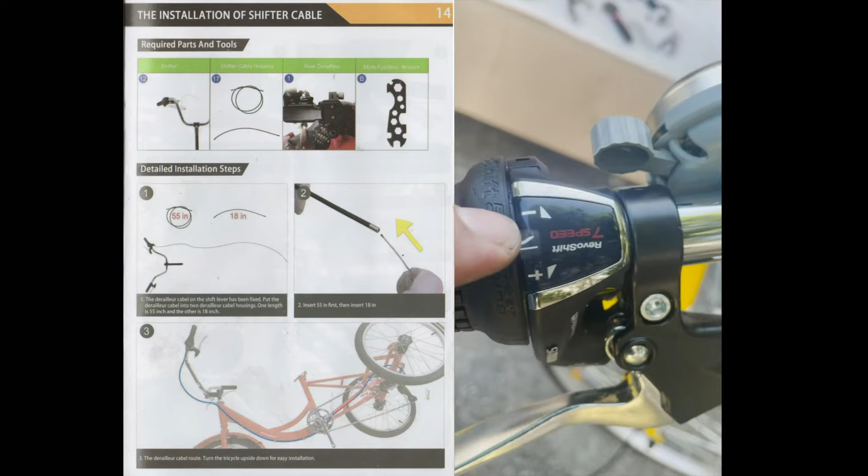As you feed that cable through, double check what your setting is here to make sure we're at the highest speed—there's 6, there's 7. Make sure this is set to 7, because when you start gearing back down to a lower gear, you want to make sure the cable is turning the right direction.

So the cable just feeds in, and then it inserts into the end of the gear knob right there. The other end comes out back here, out the other end of the cable right here, and then this is going to go into your gear shifter right here in order to pull this so the gears go up and down.

So depending on how your bicycle came, you'll notice here's the cable where the gear shifter is coming. It runs through some little guide tubes at various places—here's a guide tube here. Sorry for the shakiness.

We want to take this and make sure we run the cable through this until we can pull some of the plastic through it as well, because the plastic end needs to reach all the way back to right here. As you're bringing your cabling back for your shifter, it's going to go inside of this bar, and then we feed it through here, and this is the clamp.

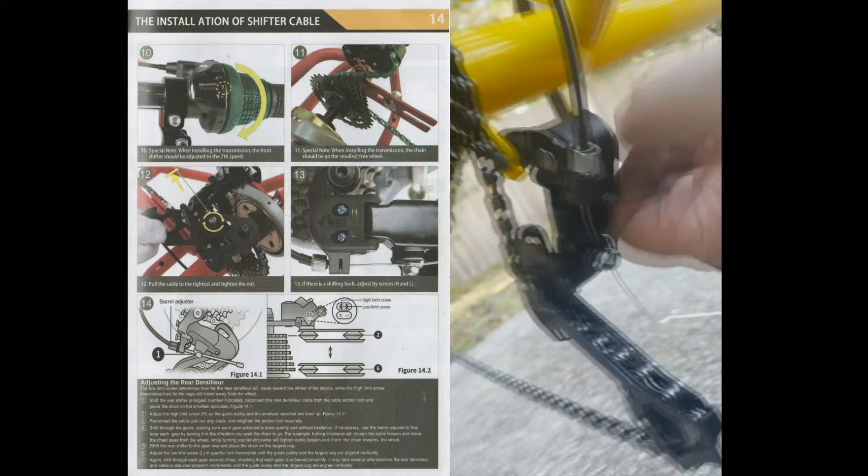Now that I have the plastic all the way to the cup, you'll notice a couple of adjustments here—this can be loosened or tightened to give some fine tuning. I don't know if there's a recommendation for how far in or out it should be to start with, so I'm going to leave it in its current position and decide afterwards if it should be adjusted differently.

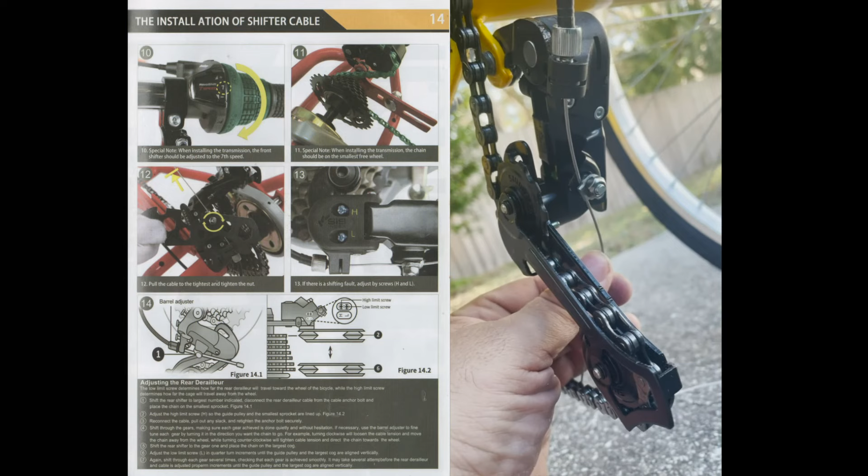This is then what tightens along the cable. It fits under this little clamp here, and we'll tighten that down to secure it. One thing you'll notice after I have this tightened on here is you have a good bit of cable left—you don't want to leave that dangling, because it's going to snag on something and cause you a problem.

So this is where you'll use your crimping tool and wire cutters to cut this off. But don't cut it too short. Leave enough length to make other adjustments if needed. You don't want it long enough to get snagged into the chain gear, or certainly not enough to get over toward the wheel. So just a couple of inches extra, and then we'll cut that off.

So this ends with talking about adjusting the shifter knob. Depending on your model, you have to make sure your cable is tight. Then there's a couple of screws in case the derailleur needs to be moved left or right, a little fine tuning. But we'll worry about that when we get ready to take our first ride. We'll check the adjustments there. So in the meantime, I think we're ready to move on to the next step.

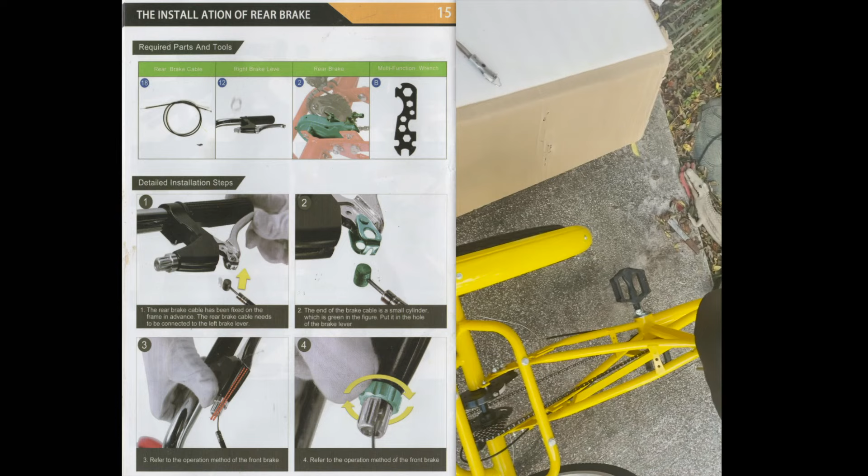Which is probably installing the rear brakes. It's going to be much like the front brakes at the start. We're going to insert the bar into the handle the way that it needs to be. Then we'll come back here to the back and look at the actual brake mechanism in the rear. As with the front brake, once we have the bar in place and we feed it up through here, we could tighten this little adjustment down to hold that in place, and we want to feed the plastic back to the insertion point.

Just like that. All right, similar to the shifter, when we have that cable in place, we want to bring this back here. This will feed through, let me get your angle better, the feed tube here. This is going to be the lock nut back here. And so we want to make sure that the plastic end, or in this case a little metal tip, securely goes into the block like that before we tighten down the cable.

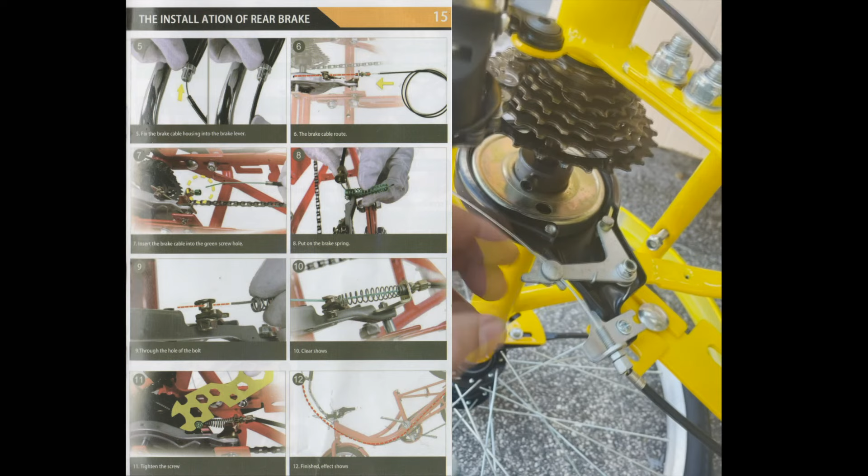I turned it up just to show you how this brake works. As your wheel turns and you're riding down the road, you'll notice it's turning this inside item here. So this brake actually pulls on a belt. There's a belt that circles this. So as you clamp the brake, it tightens on this area right here. Much like the shifter, we're going to feed this through the insert here, and then it'll go into the clamp back here. But there's also one other important step we'll get to in just a second.

Now you'll notice I have the cable inserted until the tip is inside the cup. But before we put this into the clamp, they gave us this spring. The spring goes over the cable and fits between here and here. So I'll have to take this off while I do the adjustment. Let's put this through the clamp, and then we'll adjust the spring into the right place. There. So now I have this running through the clamp. I haven't tightened it down yet.

But to show you how this works, when your wheels turn, you'll notice the axle has this additional item in here, and this has a belt. This brake has a belt that runs along the outside of that, and as you clamp the handbrake, it pulls this back, which will clamp down on this. So the adjustment for this is going to be some of these items in here to make sure that we can tighten this down, and then that'll hold the axle.